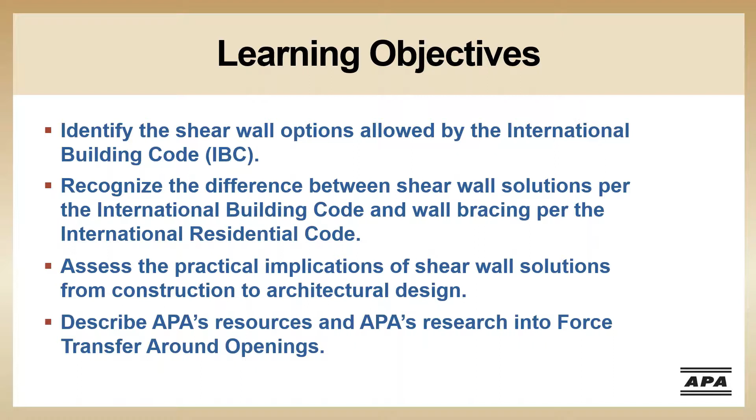Here's a list of the learning objectives that we'll cover during this session. We'll identify the IBC shear wall options. We'll identify the differences between the IRC and IBC lateral resistant requirements. We're going to discuss the impact of architectural designs on shear wall solutions, and we're going to describe the resources from our website on the topics covered today.

So what is a shear wall? We're going to talk about what a shear wall is and the differences between braced wall panels versus shear walls. How shear wall options are determined by the type of building you're designing and what is allowed in the IBC and IRC. Comparison of shear wall options in regard to what you're trying to achieve architecturally, and what is best structurally for your project, and how those decisions affect the constructability of the project. And we will provide those APA resources for both wall bracing and shear walls.

What is a shear wall? They're walls that are specifically designed to resist lateral loads. An engineer calculates the lateral loads the wall carries to determine the panel thickness, nail size, nail spacing, and other detailing. This design will often include additional hardware. Here you can see a number of clips and steel straps. This wall also includes hold downs at each end on the ground floor. The term shear wall only applies to the specific portion of the wall that is resisting lateral loads. Just because there is sheathing does not mean it is a shear wall.

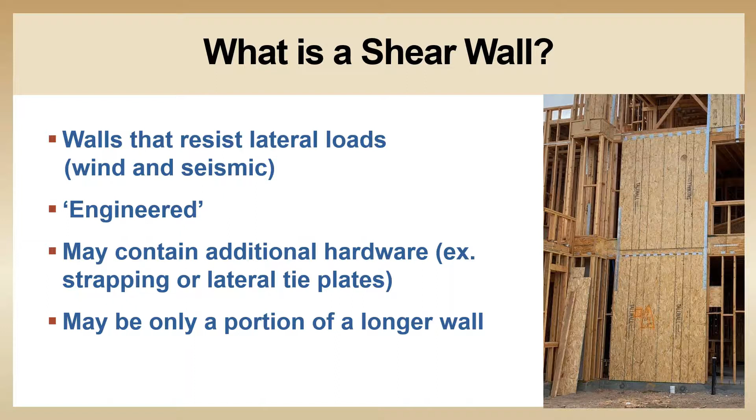When an engineer designs a structure, they look at all the loads that are applied to that structure and then create what we call a load path for each of those loads. There are two kinds of load paths, vertical and lateral. Both need to be complete for a structure to be properly designed. They're both required in the IBC and IRC. The purpose of the load path is to take the load from where it is applied to the structure, get it down into the foundation and into the ground. Every load that is applied to the structure must have a load path that takes it to the foundation so that it can exit the structure.

Everyone understands the vertical load path. It's just gravity, and we're all familiar with gravity. The vertical load path takes loads like snow loads on the roof, the weight of the furniture and people in the house, and the weight of the house itself, also known as dead load, from where they are applied to the structure down to the foundation.

The lateral load category consists of wind loads and seismic loads. The lateral load path is not as intuitive. One of the things people find surprising about lateral loads is that in some cases, these loads actually move upward through the house before they move back down. But just like vertical loads, all lateral loads must have a path that ultimately takes them down to the foundation and out of the house.

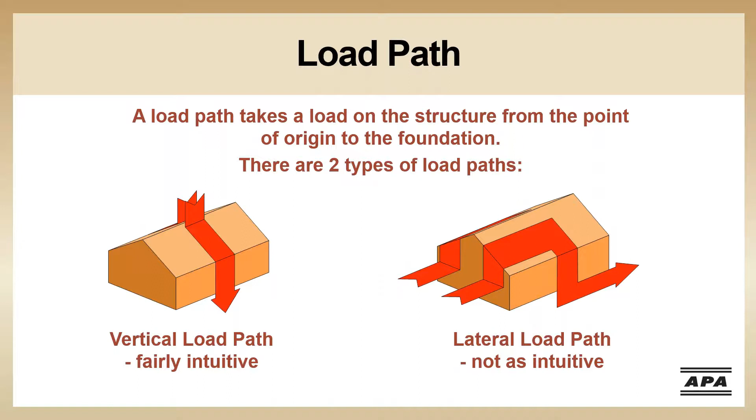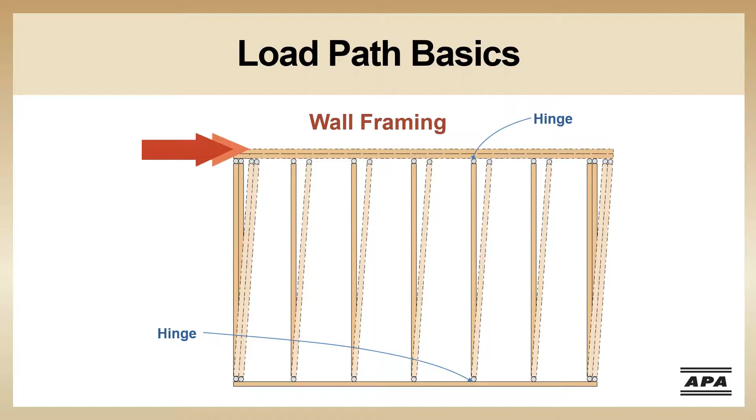Let's take a quick look at how walls resist loads. A stud wall by itself, without any bracing such as wood structural panel, has very little stiffness. When a load is applied to a wall that doesn't have any bracing, the nail joints between the studs and top and bottom plates act like hinges and are actually called hinge connections because they bend easily. The wall can be pushed over by a load applied at one end with minimal effort.

When a panel type product is attached to wall framing, the panel's ability to resist forces is imparted to the wall. This is why panels are commonly used as the lateral force resisting system. They resist being forced out of shape. The ability of a panel to resist loads is dependent on the physical properties of the panel, primarily its thickness. The thicker, more rigid each one of those panels, and more panels that are added to the wall line, the more resistance or strength the wall gains.

Fasteners used to attach the panel to the framing will also affect the lateral resistance of the wall. Tighter fastener spacing and larger fastener size will increase the strength of the wall. The sheathing makes the hinged connections rigid connections and transfers the lateral load through the panel to the bottom of the wall. In other words, the panel becomes part of the lateral load path.

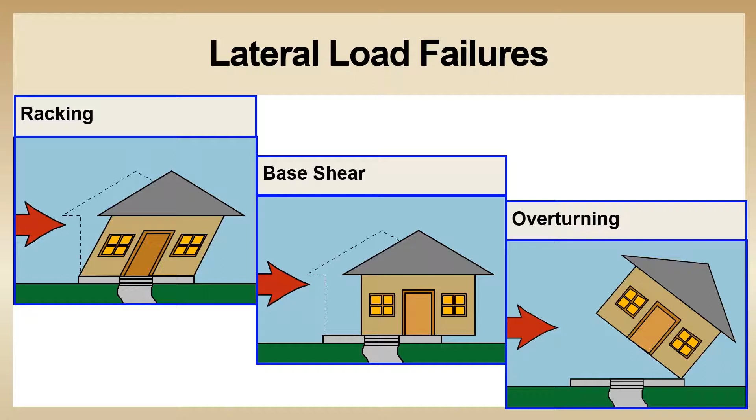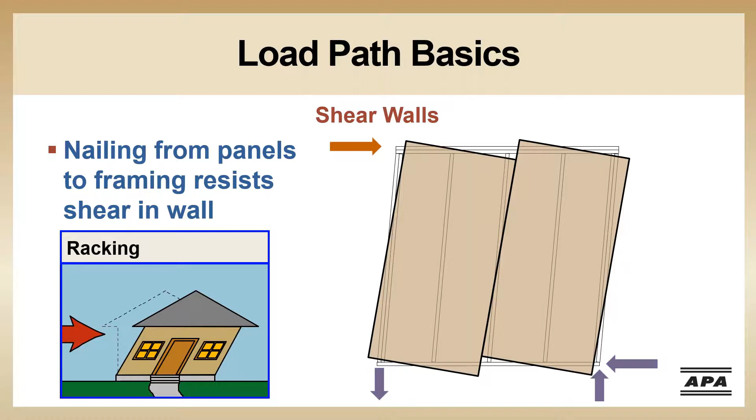There are three types of lateral load failures: racking, base shear, and overturning. Now, sheathing might provide the resistance, but if we're not getting that load into the sheathing, it can't help. This is why the attachment of the sheathing gets special attention. The sheathing nailing and thickness are two easy ways the engineer might be manipulating the stiffness of the wall. If you don't get the nailing that matches the drawing, it will affect load distribution.

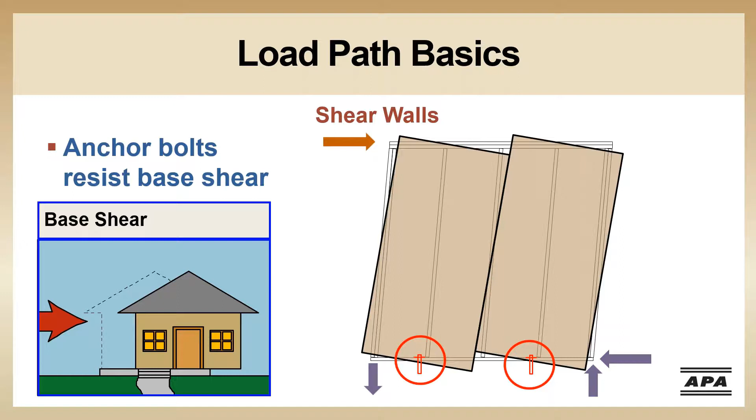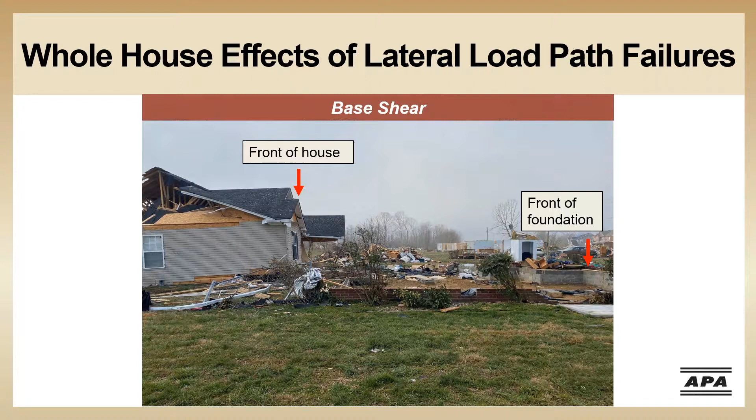The overturning loads exerted on the anchors are higher at the end of the walls. That's why we see a heftier hold-down anchor or tie-down rod at the shear wall ends. These hold-down anchors typically have a deeper embedment at the bottom and more robust connection to the wall framing.

Let's take a closer look at how overturning happens. If we have a wall with only one panel as wall bracing, when the load is applied at the top of the wall as shown, the wall will want to tip over, with the bottom or left side of the wall tilting away from the ground. This is similar to what happens when you try to push a tall, skinny filing cabinet. It wants to tip over. This is what can lead to overturning of a structure and is why hold-down straps are required in some situations.

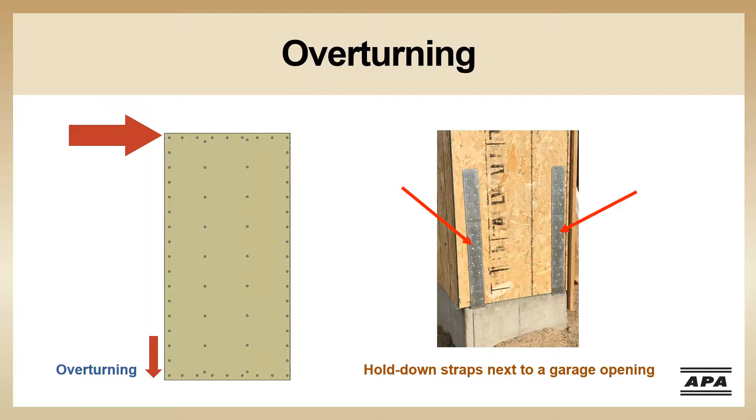They prevent the wall from tipping over and literally hold the house down. By adding more panels to the same wall, you will reduce the overturning load and reduce or eliminate the chance of overturning the structure. It would be like taking that tall, skinny filing cabinet and adding more cabinets or stretching it out. Now, when you try to push on it, it's less likely to overturn.

This is why engineered houses have limited locations for bracing, typically need hold downs, and prescriptively braced houses typically don't, except for some methods that use narrow braced wall panels. The prescriptive bracing section of the IRC, section R602.10, makes sure to require enough linear footage of braced wall panels to prevent the overturning, thus eliminating the need for hold downs in most of the methods allowed by the code.

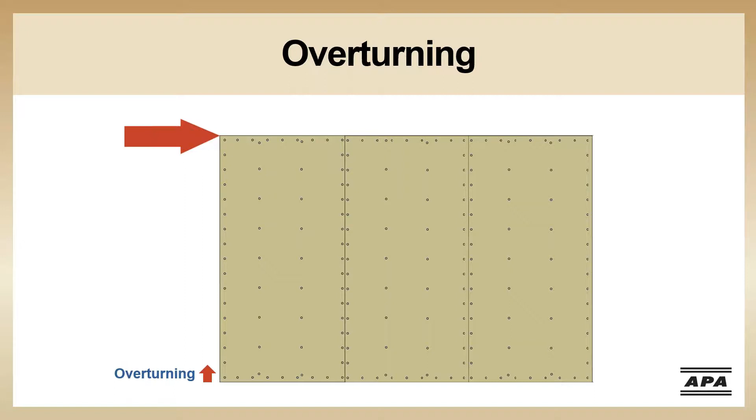Hold downs must be installed properly to be effective. One error that is commonly observed is improperly locating the hold downs.

When the wind blows from the left, the lower left corner of the panel will experience the largest overturning load. So this is where the hold downs need to be located. When the wind blows from the right, the opposite is true.

In this photo, both hold downs are installed on the right side of the panel. When the wind blows from the right, the panels will probably be okay. But when the wind blows from the left, there's nothing to provide a load path for the overturning load that will occur on the lower left corner. Without a complete load path, the panel is likely to separate from the foundation.

Hold downs should be installed on the furthest edges of the panel to be the most effective.

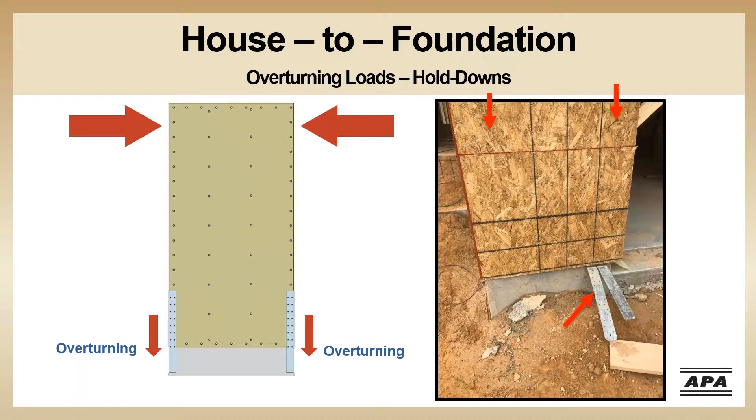Putting it all together, the shear wall components are sheathing, which is used to transfer the in-plane force. Blocking is used to stiffen the wall and increase shear capacity. And chords are at each end of the wall, which are composed of hold downs resisting tension forces when needed, and the studs at the end of the walls resisting compression.

Shear walls are limited to an aspect ratio of 3.5 to 1. A higher aspect ratio typically means higher wall deflection when pushed to capacity. Remember, deflection and stiffness go hand in hand, so this will also matter to our force distribution. I'll discuss aspect ratios a little later.

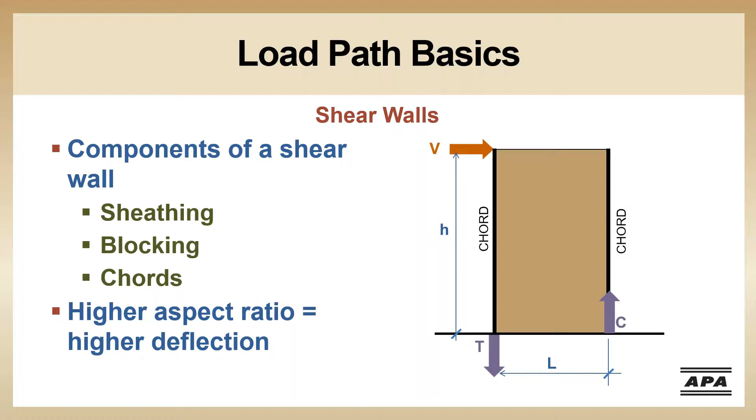With a better understanding of what a shear wall is, now we're going to look at what may be the best option for your structure. The options depend on what type of building you're designing and what the IRC or IBC allows. For single-family structures, you can use the IRC, the IBC, or a combination of both.

The evolution of home designs went from simple box designs of the past to complicated homes of today. Prescriptive solutions using IRC wall bracing are fairly straightforward. Just follow the recipe. However, the code has changed over time and that recipe has become quite long. Engineered solutions using IBC shear walls allow more design flexibility, but require engineering review. A hybrid approach using both can be the best of both worlds, but you have to make sure the two solutions are clearly differentiated on your plans.

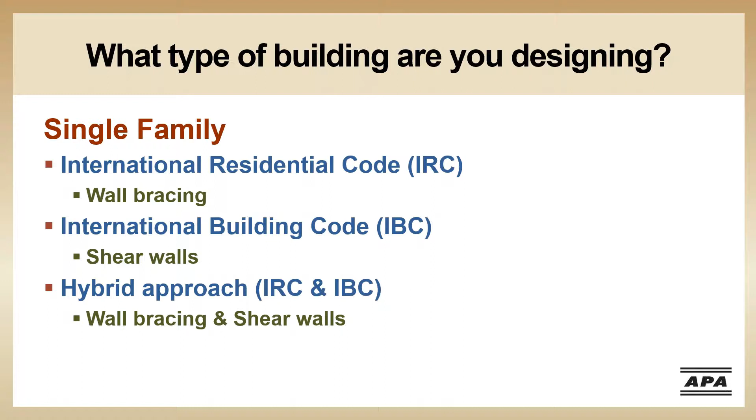Homes in the 50s and 60s were fairly easy to design for lateral loads as they were rectangular with small openings, usually single story, and had single car garages. In the 70s to the 90s, we started seeing larger homes with larger openings, offset exterior walls, and two-car garages. Today's designs are far more complicated with window walls, grand entryways, and irregular shapes.

The ICC and APA jointly publish a guide to wall bracing for each edition of the IRC. The last version is the companion to the 2018 IRC. The 2021 edition should be available shortly.

Like I said, to determine the wall bracing per the IRC, just follow the recipe. Determine the seismic design and wind speed categories. Check for any disqualifying characteristics, such as irregularity requirements for seismic or heavy snow loads for wind. Check the number of stories, wall heights, and spacing between wall lines.

Then you select your bracing method, intermittent or continuous, and your bracing material, wood structural panels or gypsum board, etc. Lay out the bracing panels per IRC requirements for placements and length of BWPs, and then confirm the braced wall panel's resistance is greater than the lateral loads, and you're done.

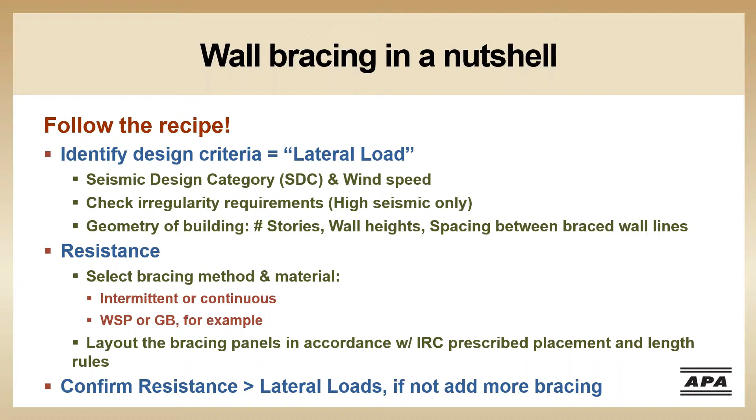What differentiates shear walls and braced wall panels? Both resist lateral loads. BWPs can look just like shear walls. Both may contain hold downs or strapping to transfer the loads. BWPs are prescriptively designed per the IRC. BWPs, except for the narrower methods, use only standard nailing patterns of 6 inches on the perimeter, 12 inches in the field. Instead of a minimum panel width, shear walls have aspect ratio limitations, the ratio of the height versus the width.

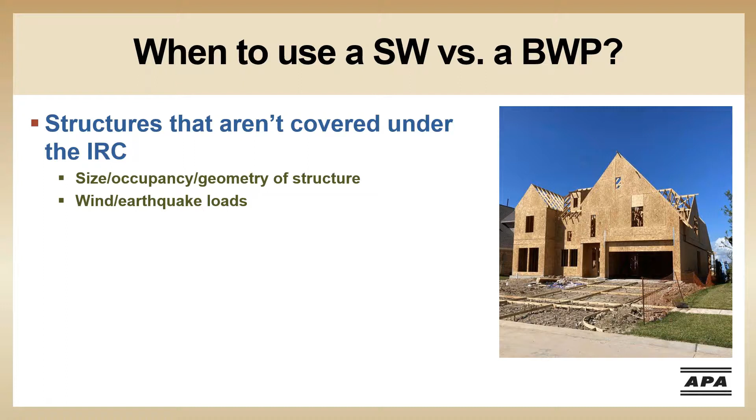But when do you use a shear wall instead of a braced wall panel? If your building does not fit within the limitations of the IRC, for example, the building isn't residential or it's over 3 stories, or the layout just precludes it.

If there's not enough solid wall area to meet the prescriptive requirement, the designer will also turn to an engineered or partially engineered solution. For many engineers, they may have had very limited or no exposure to the residential code. In this case, they're going to often default to their more familiar option.

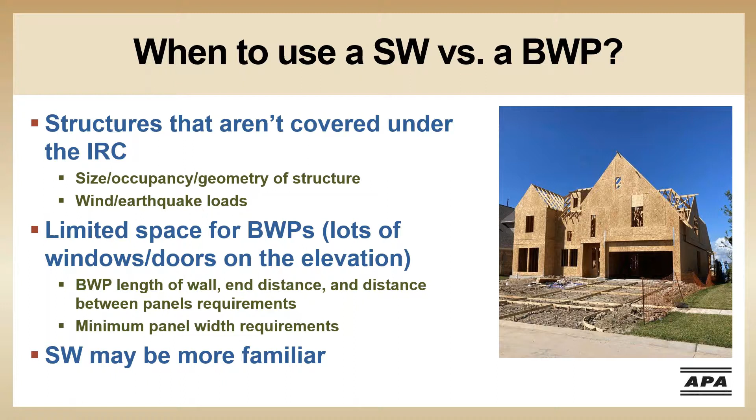The IRC lists 9 different building materials and 7 different methods that can be used as BWPs. But what about materials that aren't listed in the IRC and IBC? It is our position that the local code authority has jurisdiction to approve building materials and methods not specifically prescribed in the code.

The product advisory also includes a discussion on ductility, but it's important to understand, as new materials hit the market, what kind of performance indicators we need to be looking at before assuming they're equal. The 2021 special design provisions for wind and seismic, or SPIDWIZ for short, which is how we'll be referring to it later on, now directly references the ASTM D7989 standard used for this testing. Whenever looking at an alternative sheathing product, ideally we're getting better at predicting these performance deficiencies before something like this happens, but every failure is a learning experience.

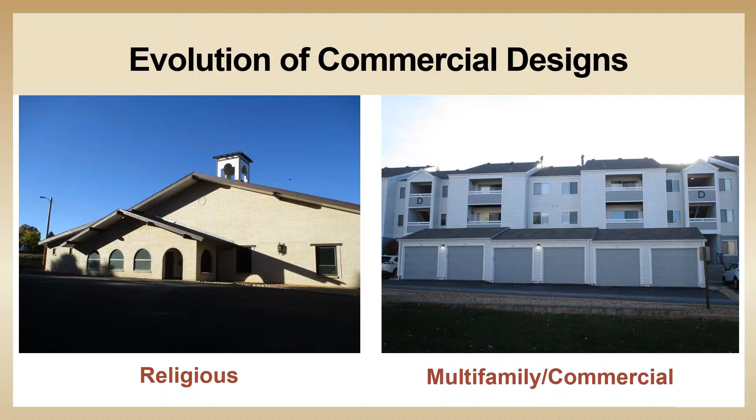Here are some examples of how commercial structures have evolved. This Church of Christ was built in the 70s, as was this apartment building. Back then, unattached garages were a luxury. Most apartment buildings only had parking spaces, very basic designs.

The Cathedral of Christ the Light was constructed in the early 2000s and is highlighted in one of our case studies available from our website. On the right, apartments are increasingly built as 3/1 or 4/2 podiums with parking garages and/or retail space and office spaces on the bottom levels.

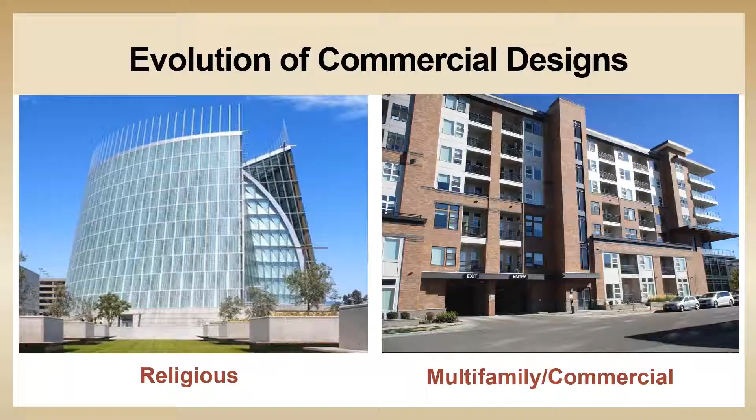When an engineer goes to design a wood shear wall, the primary reference is the special design provisions for wind and seismic, or SPIDWIZ. This book is published in conjunction with the NDS, which means the National Design Specification, by the American Wood Council. In this book, there are 3 methods listed for designing a shear wall: segmented, perforated, and force transfer shear walls, which I'll refer by the acronym of FTAO.

What about CLT? APA represents a number of mass timber manufacturers, and this is a hot topic right now as jurisdictions across the country start adopting the tall mass timber provisions. The 2021 IBC allows up to 18-story tall wood buildings. The 2021 SPIDWIZ now provides guidance on CLT diaphragm and shear wall designs. AWC and Woodworks both have a number of educational resources to help you navigate designing with this new material.

As a special note, CLT is going to use a different response modification coefficient than the 6.5 used in light frame wood shear walls. This is because the behavior during a wind or seismic event is not the same. Today, we're going to focus on light frame construction only, not mass timber.

For wood structural panels, the shear values in SPIDWIZ are a function of fastener size and spacing, panel thickness, and the specific gravity of the framing material. SPIDWIZ Table 4.3a provides nominal unit shear capacities for wood frame shear walls using wood-based panels.

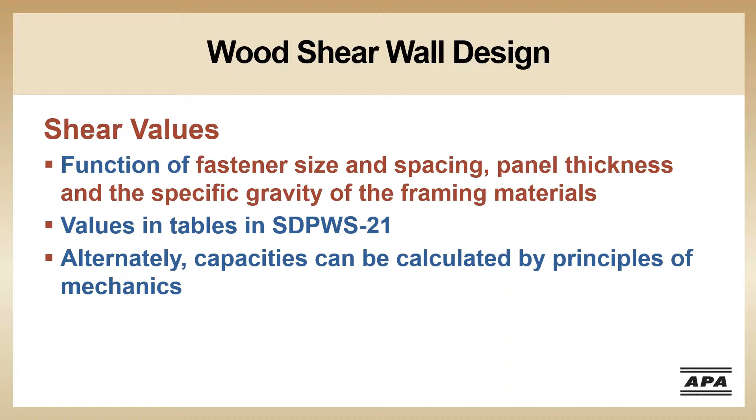Contrary to IRC wall bracing, there is no recipe for shear wall design. The engineer will analyze the loads and then select the shear wall design approach. It is important to note that you don't have to use one design method throughout. For example, segmented and FTAO can be mixed throughout the structure, even within the wall line, provided the engineer provides adequate load transfer detailing.

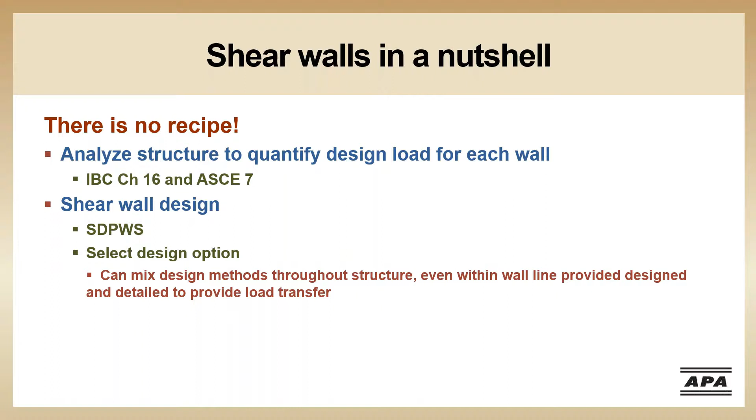Here's a side-by-side comparison of the three shear wall methods. Segmented, which is the traditional design approach, uses individual full height wall segments, but does not allow openings. The next two options, perforated and FTAO, do allow openings within the shear wall. Both allow the utilization of the full wall geometry, including the sheathed areas above and below openings. Perforated shear walls is an empirical design method based on the percentage of full height wall segments adjacent to openings. And force transfer walls, FTAO, is rooted in structural analysis. Historically, there was minimal testing of this method until APA's research, which we'll discuss further.

But now let's take a closer look at each of these approaches one at a time. For segmented wood shear walls, only full height wall segments are considered, and the contribution of the wall sheathing above and below openings is ignored. The total height of the wall is used to determine the pier aspect ratio, or height to width ratio. For example, an 8-foot wall with a 4-foot panel has a ratio of 2:1, and hold downs are typically needed at each end of each shear wall segment to resist overturning forces.

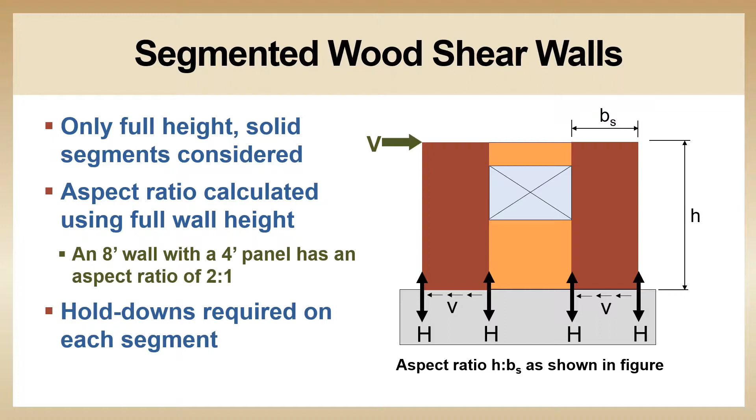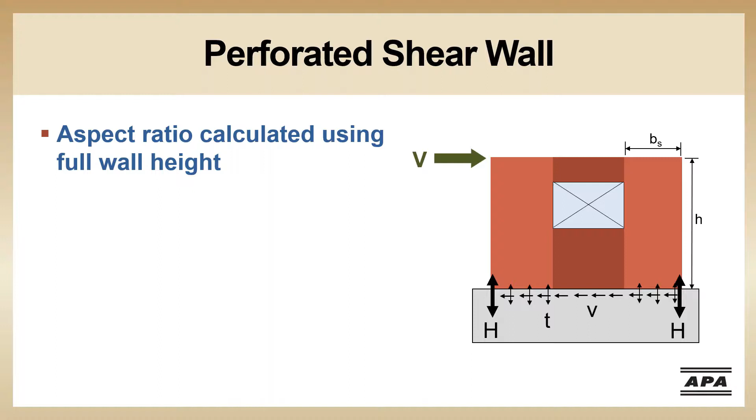Similar to the segmented shear walls, the height and width ratio for perforated shear wall piers is again dependent on the ratio of the total height of the wall over the width of the pier. Unlike the segmented shear walls, perforated walls account for the sheathing above and below the opening, but the openings have some restrictions. Steel anchors at the base of full height piers are required to resist both uplift and shear, but hold downs and anchors are only required at each end of the total wall length.

Here's the adjustment table used for the perforated method. The designer will determine the shear capacity factor based on the geometry of the wall, the percent of full height sheathing, and openings. The factor reduces the shear wall capacity and increases the design value for the hardware. This makes sense if you consider that as your wall has more openings, you have less capacity in your wall and would have a greater need for hardware to compensate for that reduced sheathing.

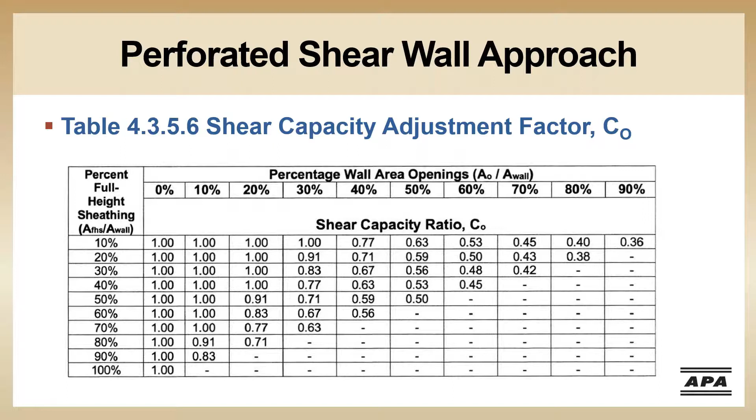FTAO has some rules for using it, but SDPWS doesn't give specific direction for the analysis, which we'll come back to in a moment. Just like perforated shear walls, we're accounting for the sheathing above and below the opening, and we're only placing hold downs at the very end of the wall. Here we're using straps to reinforce the corner of our opening and transfer that lateral force down to the base.

One major advantage of FTAO shear walls is that the height to width aspect ratio is dependent on the height of the opening adjacent to the pier, allowing for reduced pier widths to meet the aspect ratio requirements.

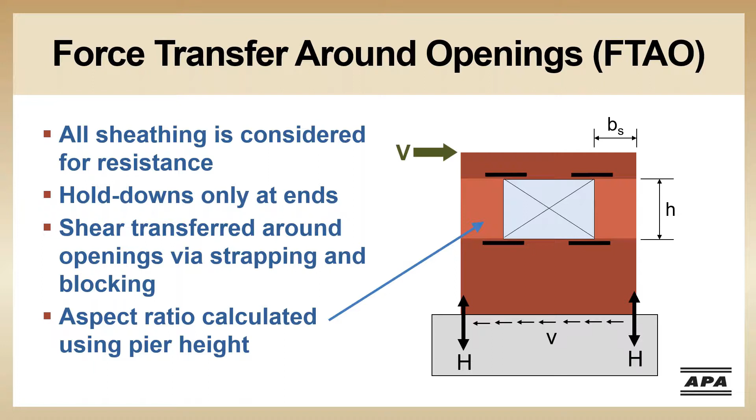APA led a joint research project to examine forces generated in these wood-framed FTAO shear walls during a wind or seismic event. This research is the basis of our FTAO design approach and calculator. The study was initiated to evaluate the effects of size of openings, size of full height piers, different aspect ratios, and different construction techniques. We also wanted to measure the internal forces generated and compare them to different FTAO analysis methods. And finally, we wanted to create a calculator to assist designers with designing wood frame structures using the FTAO method.

We surveyed design offices and found that there are 4 techniques that are most commonly used to predict force transfer around openings: the drag strut analogy, cantilever beam analogy, the Diekmann method, and the Thompson method.

A more detailed explanation of these techniques and this example are covered in APA's webinar, Advancements in Force Transfer Around Openings, which can be viewed at apawood.org.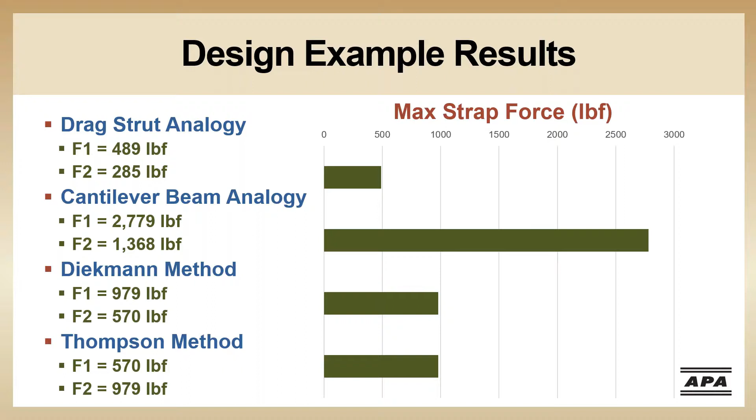So this is a pretty wide range of results. It was one of the focuses during the research project: what is the most accurate analysis method for FTAO? There were 12 total configurations tested, so let's go through a handful of them so you understand the variables APA was looking at. It's important to note here that the total wall length and height remained constant, all the nailing remained the same, and the same type of sheathing was used on all test specimens.

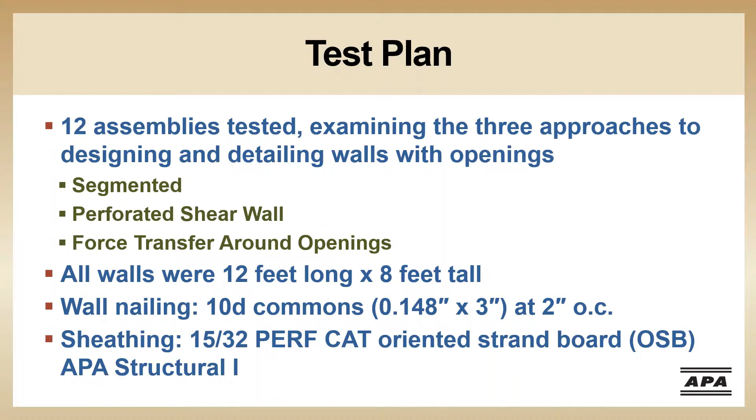Wall 2 is similar to wall 1, except now we have sheathing provided above and below the openings as you would have in a perforated shear wall. No strapping or blocking around the opening was provided for wall 2, and 2 of the hold downs that are in wall 1 have been eliminated.

Wall 4 was our first wall that had the full FTAO detailing. Wall 4 has the same geometry as wall number 1 and 2, with sheathing above and below the openings, and only 1 hold down at the left end and 1 at the right end of the wall. We also have the strapping provided on the exterior of the wall.

Wall 5 has similar detailing to wall 4 with the corner straps and blocking, except now the opening size has increased with a smaller area of sheathing below the opening.

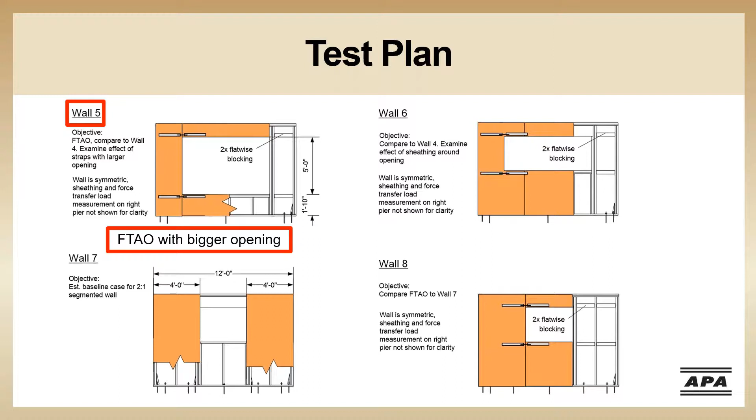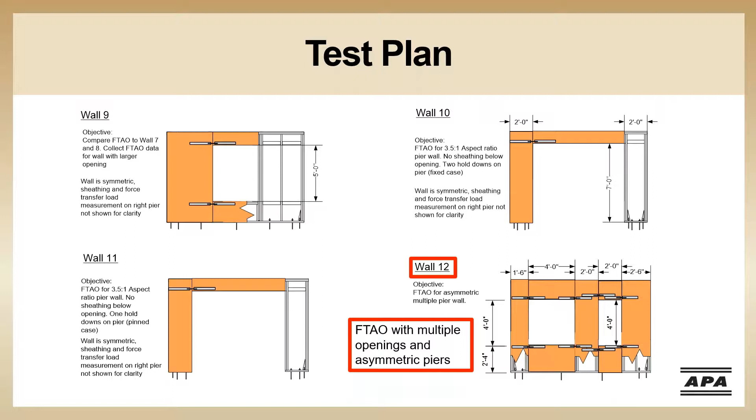Looking at wall 4 configuration, which again is the FTAO method, we have relatively narrower pier widths with a deep sill. Comparing the effects of a bigger opening size in wall 5, also FTAO method, we saw decreased stiffness and larger corner forces than in wall 4. But both walls are stiffer and stronger than the segmented and perforated walls.

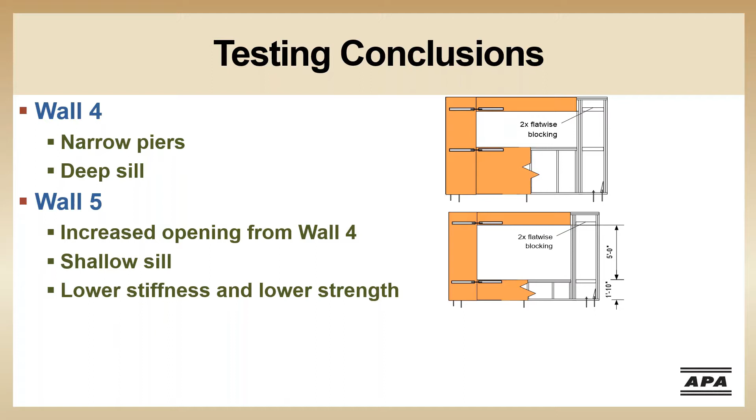Now let's look at the results of the strap forces measured during testing. This chart compares the measured strap forces and the predicted strap forces per the four design methodologies. When looking at this chart, look at the areas highlighted in yellow and green. You can see each of the wall configurations we tested identified on the left.

The yellow color coding represents cases where the forces calculated by the analysis methods were less than the forces measured in the lab. The green color coding represents cases where the forces calculated by the methods were greater than the force measured in the lab by at least 300%.

So we can see that the drag strut technique results are unconservative for most of our wall configurations. On the other hand, the cantilever beam method is primarily green, particularly on the top force, or the force above the opening, when we compare our analysis results to what was measured. That leaves us with Diekmann and Thompson techniques. These methods really are the most accurate when compared with the wall configurations that we tested.

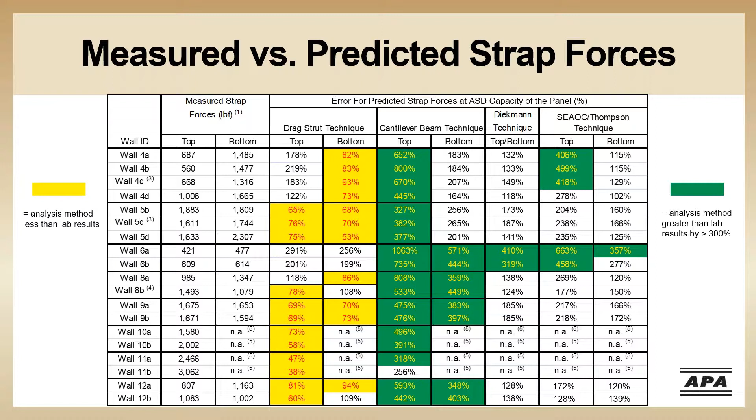Looking at wall 12 once again, this configuration has the full FTAO detailing with multiple openings and asymmetric pier widths. Laboratory testing determined that the Diekmann method was the most accurate analysis method to estimate the forces in the shear wall. So we chose to use the Diekmann method as a base to expand the methodology to incorporate multiple openings and asymmetric piers. We use this for the basis of our FTAO calculator, which we're going to cover later in the training.

So now let's compare the shear wall options structurally, architecturally, and their constructability. Let's take a quick look at the structural design comparisons.

In the segmented method, the pros are that it's easy to design. The cons are that there's limited wall area to work with, it requires additional hardware, and it doesn't take into account the capacity of the sheathing above and below openings that are outside of the designated shear wall segment. It can be hard to meet the aspect ratios of this design method.

For the perforated method, the pros are that it's relatively easy to design. You get to use the capacity of wall sheathing above and below openings, and it reduces hold downs. The cons are that designers have to use the full wall height for the aspect ratio, they have to design for uplift at each full height segment, and some engineers don't like the limitations of the adjustment table we showed earlier.

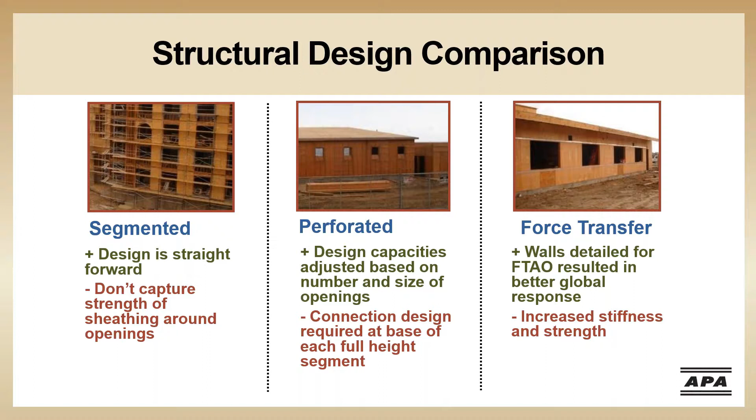As stated at the beginning, generally the driving factor for FTAO is where you don't have a wall long enough to meet your height to width aspect ratio, whether that's 2:1 or even 3.5:1. So in those instances, you really are forced into using FTAO.

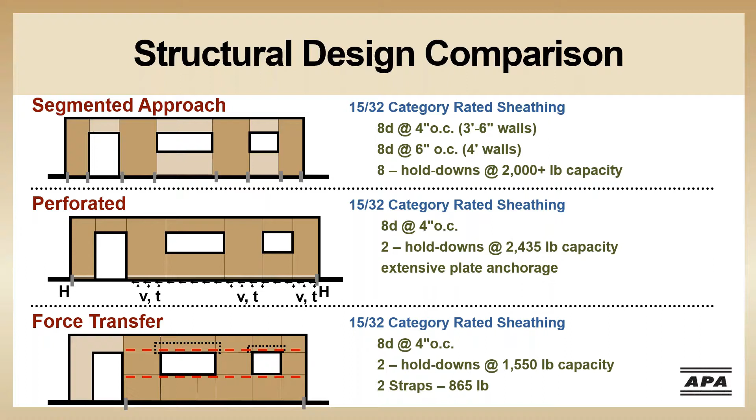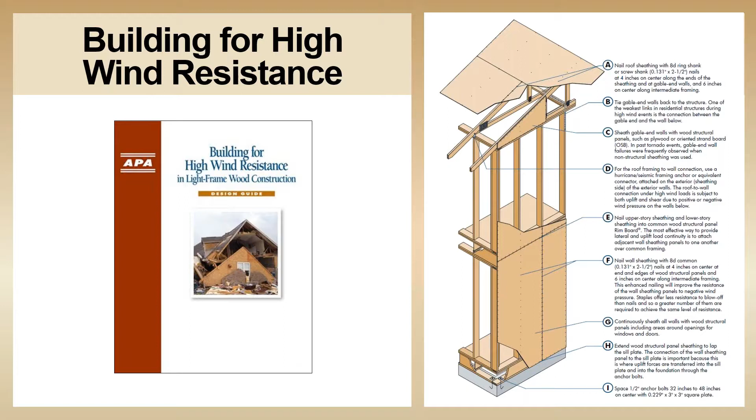The resilience of a structure relates to its ability to withstand and recover from a disaster. Using wood structural panel wall sheathing to create a structural shell is a cost-effective method for adding strength and resilience to your structures. I'd like to point out that some of the design recommendations found within this guide exceed the minimum code requirements and typical APA recommendations.

Here's an option to resist uplift loads between floors of a structure and could reduce the amount of hardware needed here. Our recommendation in our high wind publication is to nail the upper and lower story sheathing to a common rim board. In most multifamily projects in my territory, I notice that this area is usually filled in with wood structural panel sheathing and requires straps to resist the uplift loads.

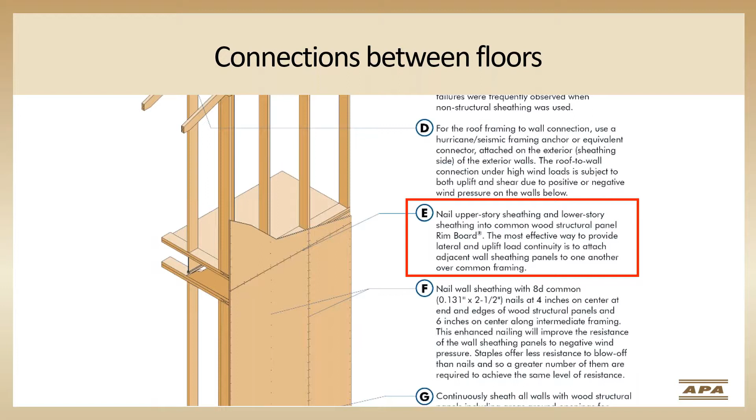But wood structural panels can also be used to transfer the uplift forces in addition to the shear. We have a design guide to address that on our website.

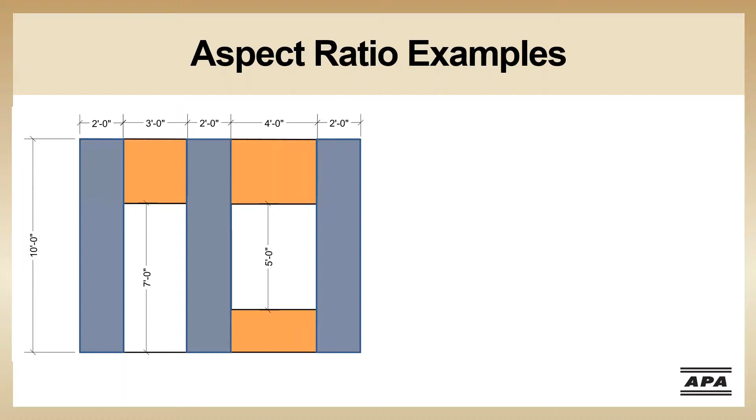So how does shear wall choice affect the architectural vision of the project? Shear walls with narrower aspect ratios will allow more openings and can also be larger. For example, if we look at this wall configuration using a segmented or perforated method, we need these wall piers to meet that 3.5:1 aspect ratio. These piers are still a 5:1 aspect ratio, so we don't get to use them.

Aspect ratios impact structural designs and architectural designs. The architect wants to maximize the openings, whereas the engineer has to meet the aspect ratios to count as shear walls. But if we take that same wall and design with FTAO, we only need these areas to meet the aspect ratio.

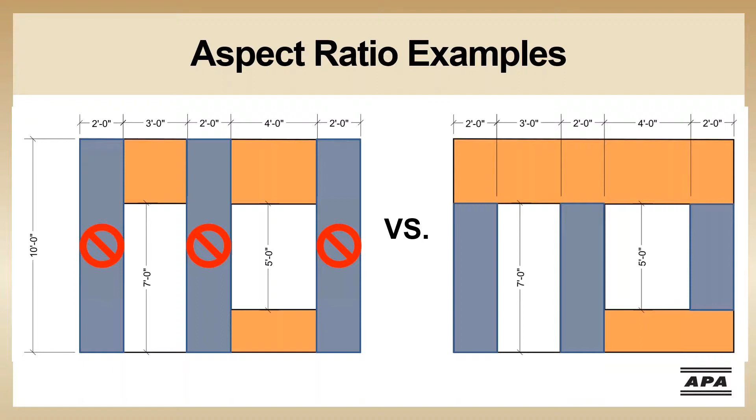The code requires shear walls must meet a 2:1 aspect ratio and can be as narrow as 3.5:1 with an adjustment applied. The area next to the doorway is 7 foot tall and divided by the 2-foot pier width, yielding a 3.5:1 aspect ratio. To the right of the window, we use 5 feet equal to the opening height divided by the 2-foot pier width for a ratio of 2.5:1.

The shear wall choices also affect your building's envelope ability to resist moisture and air intrusion, the energy efficiency, and the cladding attachment.

APA has a recommendation on how to mitigate bulk water intrusion and can be summarized by these 4 steps: deflect, drain, dry, and use durable building materials. Fully sheathing with WSPs is an integral part of this solution.

First, deflect the water intrusion by using gravity. Roofs are sloped, the ground is sloped away from the building, and roof overhangs can minimize the water hitting the wall.

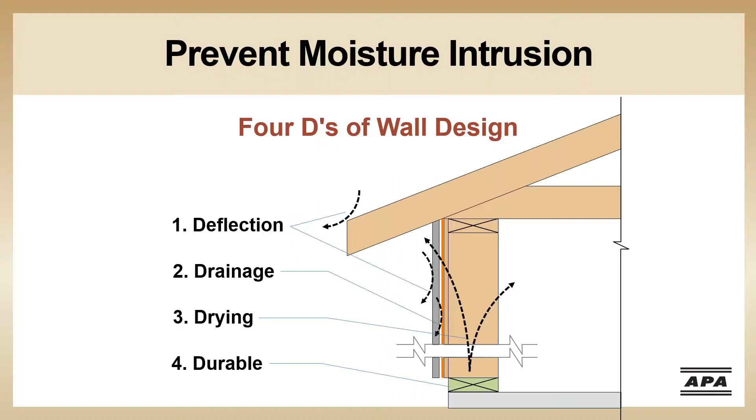The rain that does hit the wall can be allowed to drain away using exterior cladding, and the secondary code-required water-resistive barrier under the cladding. If and when water does penetrate the primary and secondary water barriers, the wood assembly must have a means to dry. Wood structural panels are considered a smart vapor retarder.

The permeance of smart vapor retarders is low when the relative humidity is low, and increases as the relative humidity increases. Therefore, the increased permeance when the wall humidity is elevated allows for greater vapor movement and faster drying of the wall. As shown in this figure, water vapor permeance of 7/16 OSB is approximately 2 perms at 50% relative humidity, but increases by a factor of 6 up to 12 perms when the humidity is increased to 85%.

Finally, using durable building materials and extra care in locations that are exposed to longer-term wetting, such as where wood is in contact with concrete, completes the 4 Ds of design to prevent moisture intrusion.

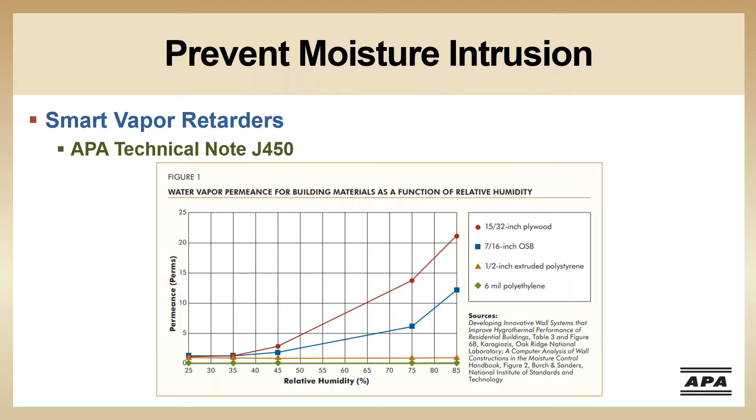Did you know that wood structural panel wall sheathing can be used as a code-approved air barrier system?

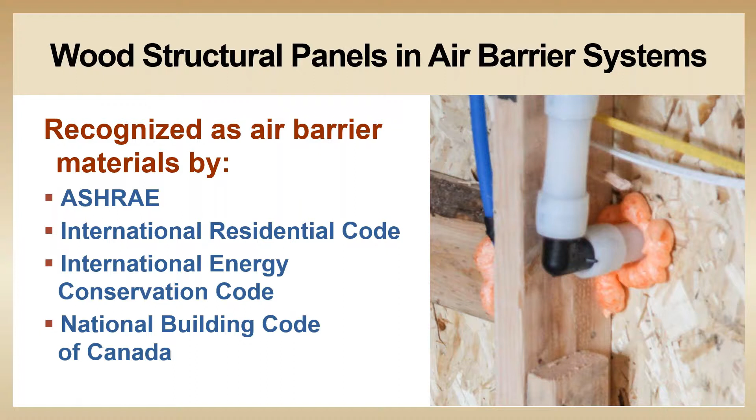WSP products with a performance category of 3/8 or greater are recognized as air barrier materials by ASHRAE, the IRC, the International Energy Conservation Code, and the National Building Code of Canada. Air barriers are systems that resist airflow and pressure that completely enclose the air within a building. Wood structural panels are excellent code-approved air barrier materials, as I mentioned.

They're rigid and durable, which are 2 important characteristics to consider when selecting material to be a part of a continuous air barrier system. When using WSP materials, it is incumbent on the designer and builder to choose an appropriate method for sealing openings and panel joints. The joint sealant or tape manufacturer should be contacted for information on how their product works with wood structural panel substrates.

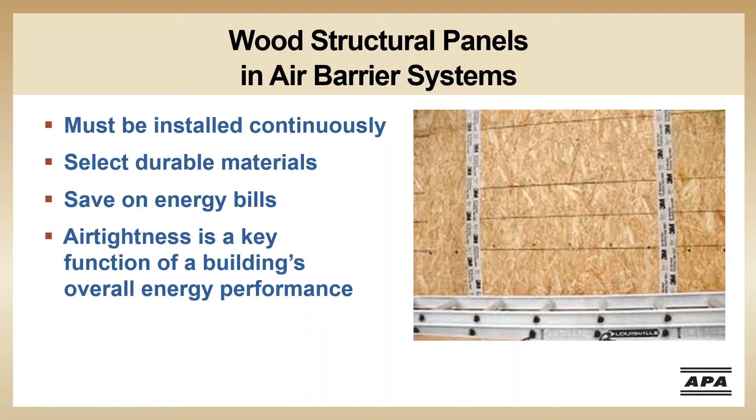For more detailed information, APA has developed a technical topic that discusses the performance of wood structural panels when used as part of air barrier systems, and it is available to download from our website.

Fully sheathed wall panels provide a solid backing for blown-in insulation systems and create an efficient, strong wall system. Spray-in cellulose, fiberglass, and mineral wool insulation can provide high R values, which is desirable in some markets.

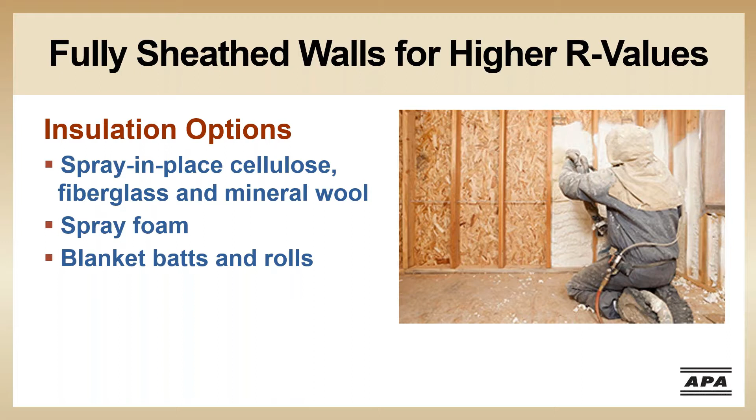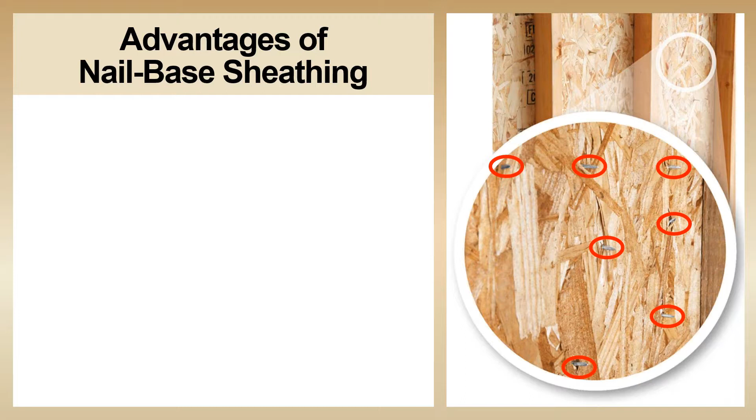Another extremely valuable benefit that comes with continuous wood structural panels is their ability to be used as a nail base for the attachment of siding, trim, brick ties, and many other cladding types. Continuous WSP wall sheathing is a secure, code-compliant nail base that provides an easy and effective solution for attaching all claddings. Let's review some of the advantages that plywood or OSB offer when used as a nail base.

They eliminate the need for cladding installers to hit the studs. They allow for the use of shorter fasteners, requiring that the fasteners fully penetrate the OSB or plywood by only 1/4 of an inch. They ensure that cladding materials stay in place during high wind events, and they eliminate the need for additional blocking to support ventilation and siding when ends don't fall on studs.

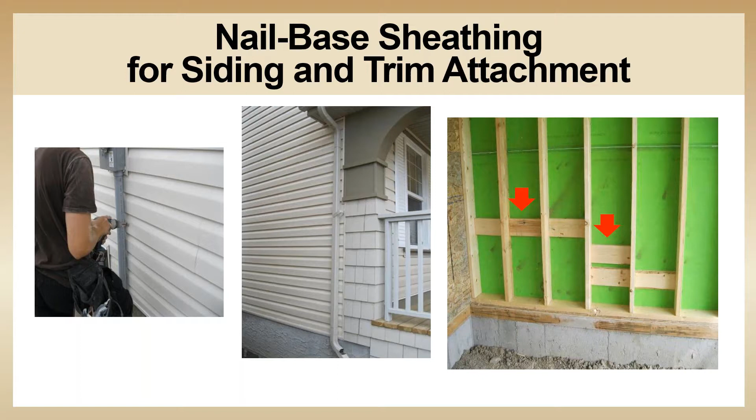Without OSB or plywood to act as a nail base, the siding, along with any mechanical or electrical services, as well as wide exterior trim, will need to be fastened directly to the studs or to additional blocking installed within the wall framing as shown here.

When it comes to fastening recommendations when using OSB or plywood as a nail base for your siding or trim, our nail base sheathing for siding and trim attachment construction guide provides an easy method to determine the type and spacing of siding fasteners to satisfy building code requirements for cladding materials which weigh up to 3 pounds per square foot. This includes wood lap and panel siding, vinyl siding, fiber cement, wood shake and shingles, synthetic stuccos, and other popular cladding materials.

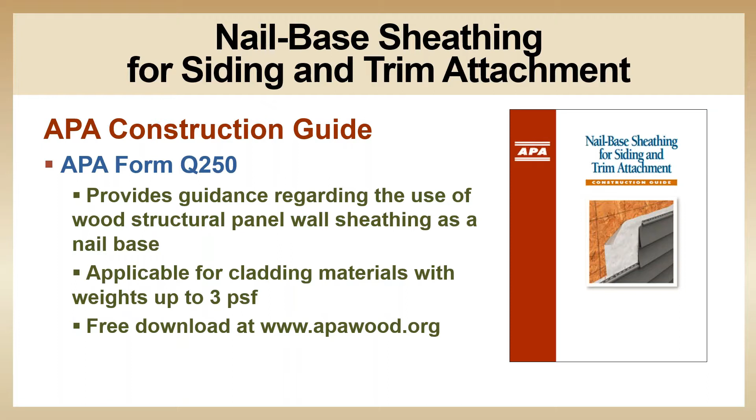Depending on the fastener type and the performance category of the wall sheathing, you will find the recommended fastener substitution schedule. Note that when using ring shank nails or wood screws, the fastener substitution schedule is 1-to-1 versus smooth or screw shank nails.

This benefit was put to the test by the Insurance Institute for Business and Home Safety, and the results are clear. Siding attached directly to continuously sheathed plywood or OSB walls is able to withstand the same wind and weather conditions as siding attached directly to the framing.

In fact, siding need not be attached to any framing members so long as the fasteners fully penetrate the sheathing by that minimum of 1/4 inch, and the correct fastener schedule is followed. This is also true even when siding is attached to plywood or OSB through a layer of non-structural continuous insulation up to 2 inches in thickness.

As you can see, even after the roof system completely failed due to a high wind force, the siding remained intact.

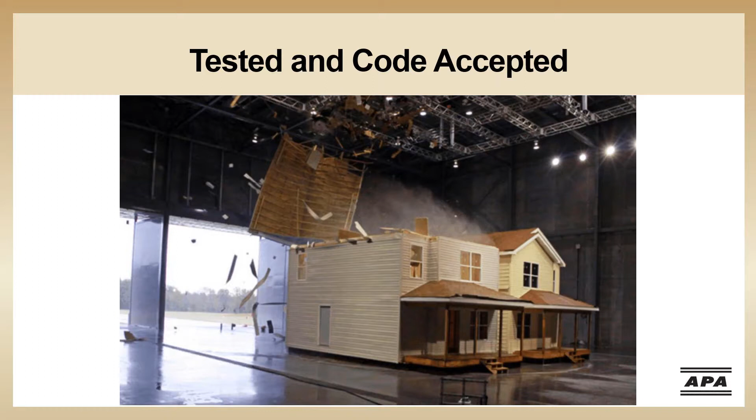If the weight of your cladding material exceeds 3 pounds per square foot, we have a technical topic which discusses fastening requirements for that material with weights up to 11 pounds per square foot. However, this only applies when cladding materials are attached directly to wood structural panel wall sheathing.

For builders who specify the use of brick veneer, both OSB and plywood wall sheathing may also be used as a nail base to support brick ties and eliminate the need to hit studs.

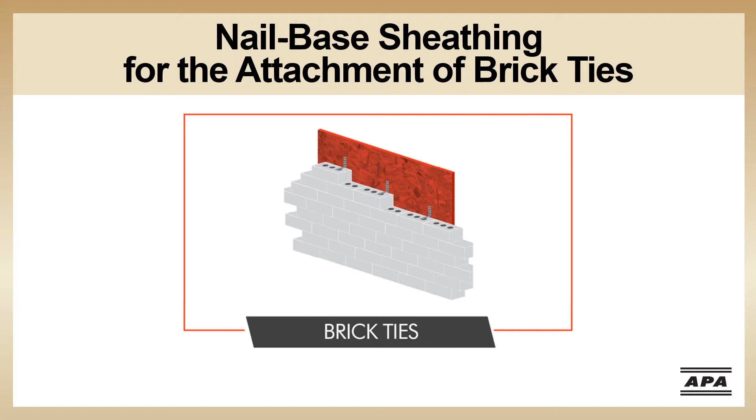Remember that the cladding or veneer is being supported by the wall, so the wall needs to be braced such that it will not deflect or rack during high wind events or an earthquake. If the wall sheathing is able to move, so too will the material attached to it, including the brittle cladding like brick veneer.

In the US, IRC Table R703.8.4 specifies fastener types, sizes, and on-center spacing of brick ties when wood structural panels are used as a nail base. The required brick tie vertical and horizontal spacing depends on wind speed and level of exposure. In Canada, it isn't quite as clearly defined, but the concepts are the same. Just be sure to check with your brick tie manufacturer for more information.

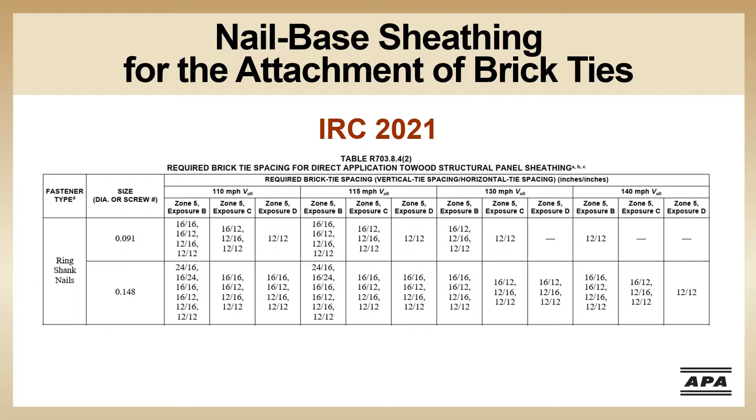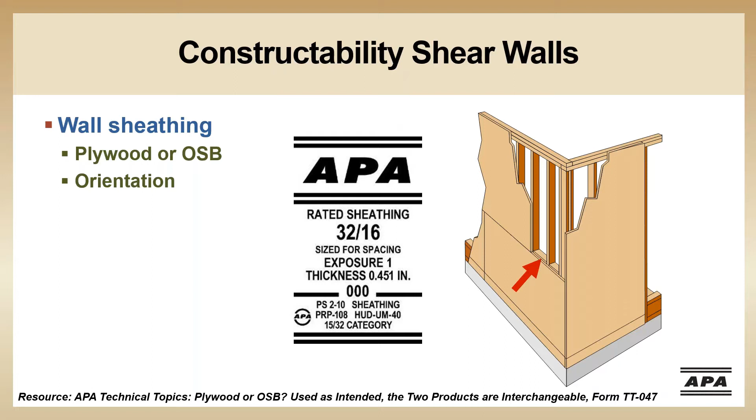Now we're going to look at the constructability using wood structural panels and the hardware needed for shear wall options. All shear wall options utilize wood structural panels in segments or fully sheathed. They can be installed horizontally, which would require additional blocking at the panel joints, or they can be installed vertically, which minimizes blocking. It's really only a matter of preference.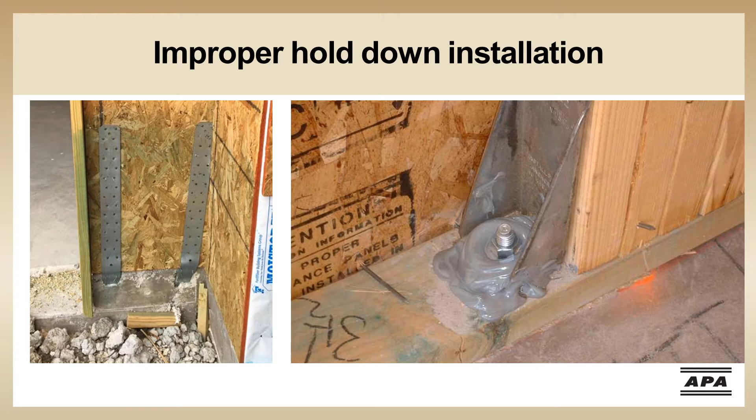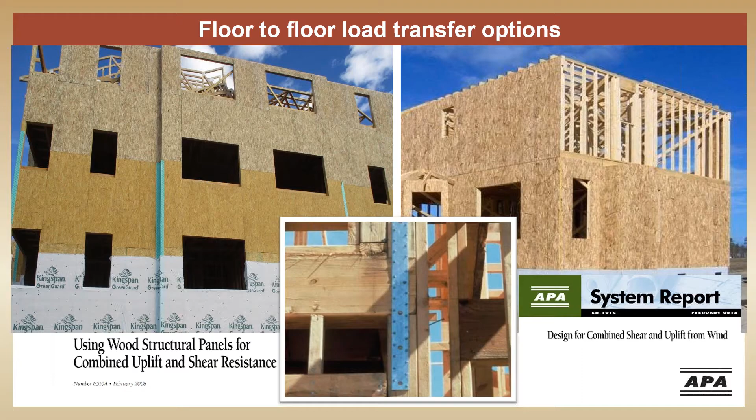The next area of concern is transferring the uplift forces from the wall above to the walls below and ultimately to the foundation. There are several ways to accomplish this using wood structural panels. We can use panels for combined shear and uplift to transfer these forces by butting the wall sheathing over the rim board or by spanning the wall sheathing past the floor cavity. We can also use straps to transfer the uplift forces in conjunction with proper connections to transfer the lateral loads. For additional design guidance, see APA's Technical Note E510 and System Report SR101.

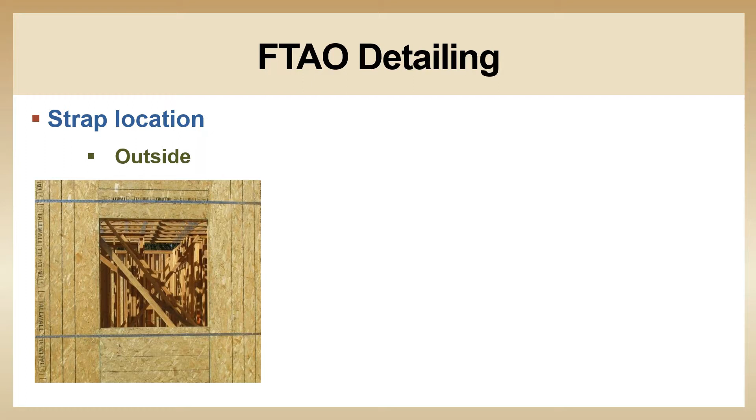They can also be located on the interior of the wall. If this is done, the framer would still need to provide the specified nailing of the shear panel into the blocking. However, some builders prefer to install the strap on the inside for ease of construction and to avoid conflict with the window flashing. And they don't necessarily have to be continuous. This has been frequently misunderstood, and our technical note has clarified this in the latest update as well.

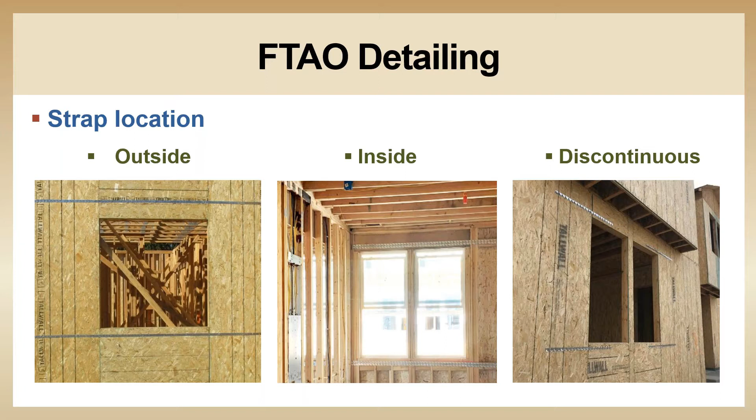And if blocking is installed on the inside of an FTAO wall to transfer those compression forces, remember you're installing the corner straps to the inside of the wall. The blocking would need to be flush with the sheathing and the strapping.

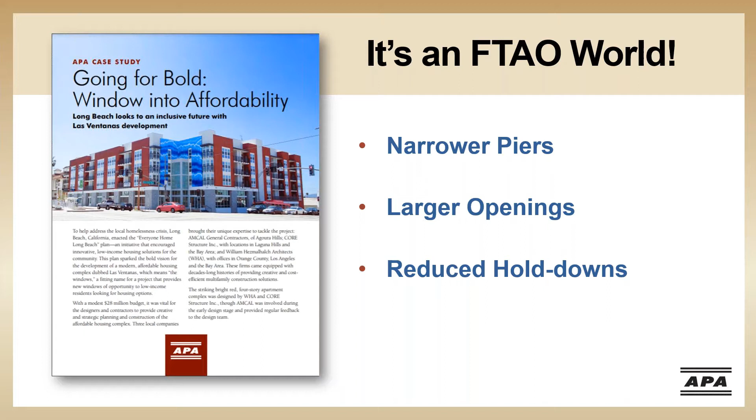We published 2 cases on the advantages of using the FTAO method. The first project was Las Ventanas, a modern, affordable housing complex in Long Beach, California. This case study features the use of FTAO to fully sheathe the building exterior with wood structural panels as well as glue-lams and LVLs. The FTAO method facilitated narrower piers, resulting in more flexibility with opening sizes, and it reduced embedded hardware.

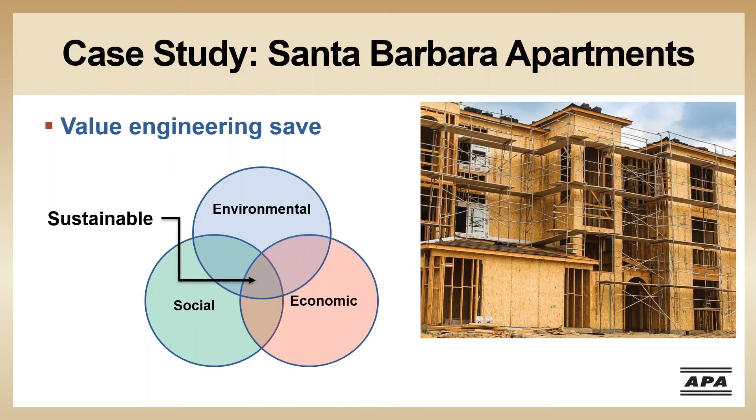The value engineering of this Santa Barbara apartment complex used I-joist compatible glue-lam beams, FTAO in place of steel shear walls, which made this project more affordable, environmentally friendly, and equitable. The money saved was transferred to community amenities.

The wood structural panels are there to keep the wall square and prevent racking. The more sheathing on the walls, the greater the building's ability to resist wind and earthquake. The sheathing also provides other benefits such as an uninterrupted drainage plane, an improved air barrier, a continuous nail base for cladding materials, and creates a stiffer wall favorable to brittle finishes like stucco.

So what are the panel installation recommendations? The wall sheathing grade, thickness, and fastening should be called out in the plans. As a minimum, IBC requires the panels be fastened at the perimeter with 8 penny common nails at 6 inches on center and 12-inch on center at the intermediate supports. But note tighter nail spacing may be specified for shear wall applications.

By understanding the big picture, it's easy to see how fully sheathed walls offer many advantages.

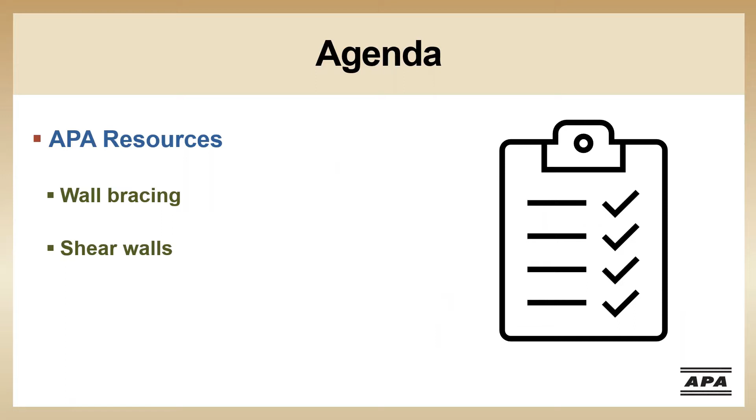Last, I'd like to point out our APA resources for wall bracing and shear walls. A couple of resources you'll be interested in are the book titled A Guide to the 2018 IRC Wood Wall Bracing Provision, co-authored by the ICC and APA, available on the iccsafe.org website. Another resource is the publication Introduction to Wall Bracing, found on our website at apawood.org.

We also have a wall bracing calculator for residential structures. The calculator is updated for every code cycle beginning with the 2009 IRC and is currently updated to the 2021 IRC. It's accessed through our website, which also includes a quick start guide available for download at the start page, as well as a short step-by-step video on how to use the calculator.

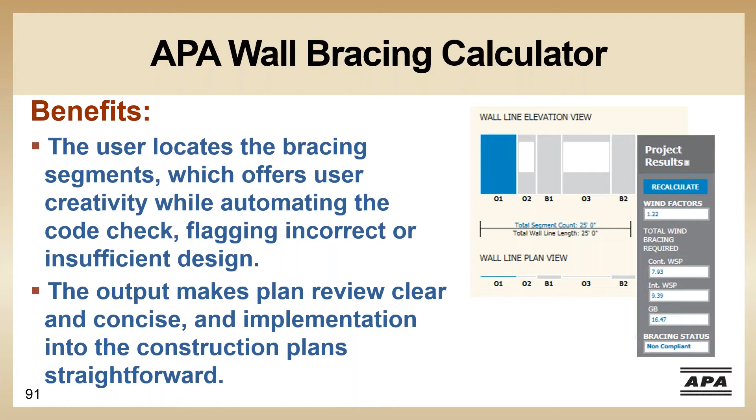It offers the designer flexibility by allowing you to change opening sizes and braced wall segments, all while automatically checking for code compliance, and the output will match up with your drawings.

As I mentioned earlier, the information gathered from our shear wall test results was used to develop design resources to facilitate FTAO shear wall design. All of these design resources are free and available for download from our website. These include APA's technical note, Design for Force Transfer Around Openings, and APA's FTAO calculator.

If you'd like more information, please visit our website. You can find the test report by searching force transfer or form M410, as well as a full hour-long FTAO webinar on our webinar page.

The technical note, form T555, presents the rational analysis for applying the FTAO method. This publication was developed based on APA's results from that wall 12 configuration we discussed previously. The technical note also provides a design example for an FTAO shear wall with 2 openings.

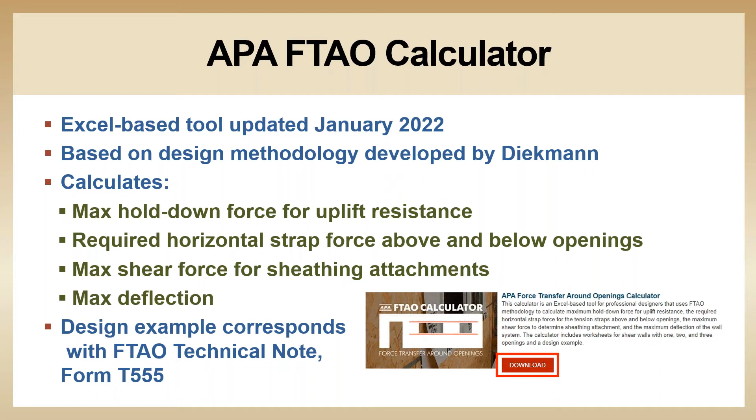As a companion to the technical note, APA also developed an Excel-based force transfer around openings calculator. This calculator is a tool for engineers to use for analyzing shear walls with up to 3 openings.

The calculator's final design output includes FTAO shear wall analysis with the full design equation shown, a summary of the final design requirements, and the total calculated deflection. The analysis results fit on 3 pages and can be printed directly from Excel or saved as a PDF file to be introduced in the final calculation package.

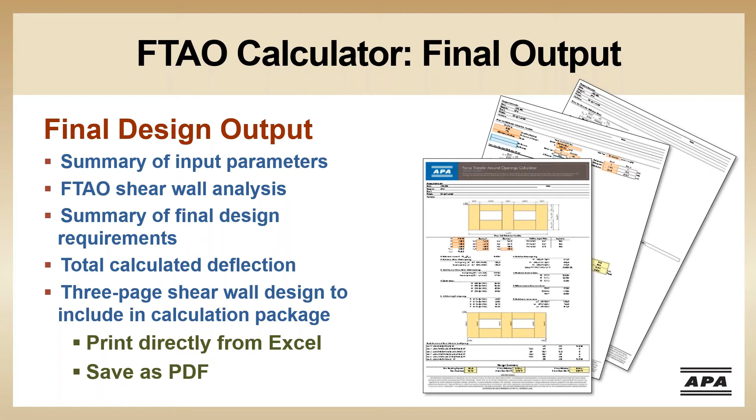This brings us to the conclusion of our presentation today. We learned about the differences between braced wall panels and shear walls. We learned what the 3 methods are for designing shear walls, and we pointed out the differences of those methods. We also referenced several APA publications that are all free to download from our website at apawood.org.